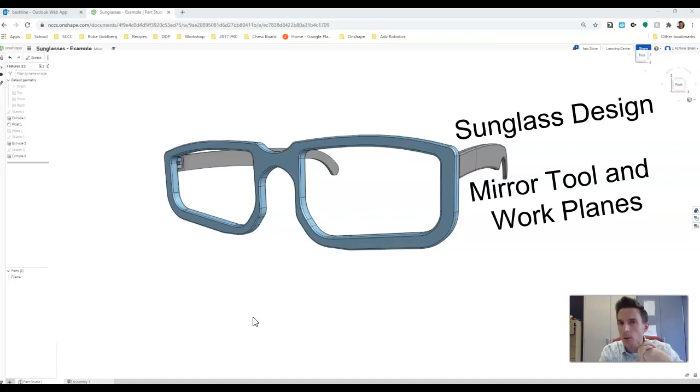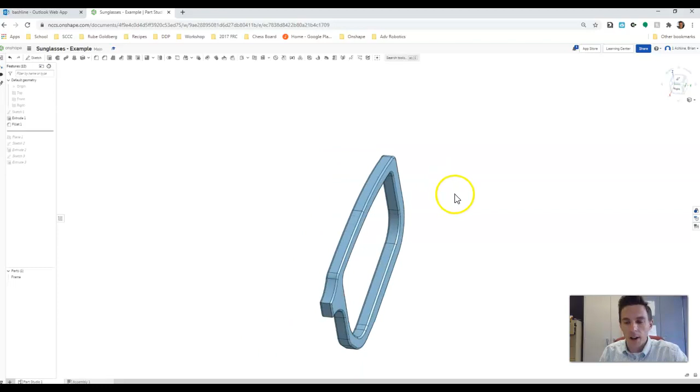So at this point I've drawn half of my frame. I've also drawn the hinge that's going to go into my frame, but that's one of the main things I want to show you today. So we're going to erase that for the moment and start back where we don't have that. Now the issue with creating this hinge is the fact that I don't have a flat plane to start drawing this thing on. I really want to draw it from the top view down.

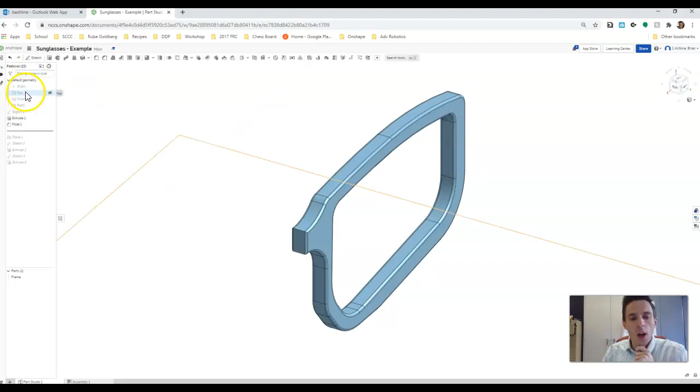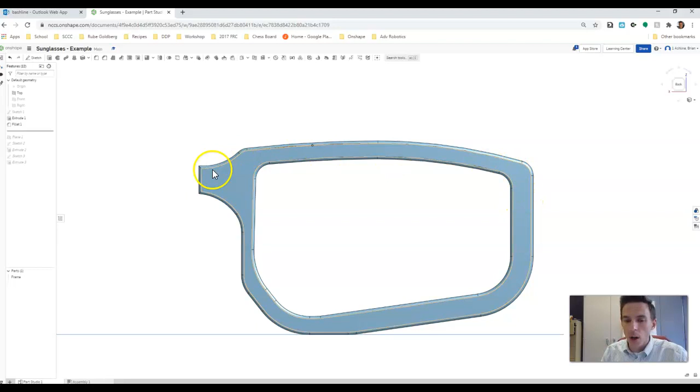Because of that, I really need to create a work plane, which we have talked about before, but I want to review it rapidly with you guys. I want to be drawing on my top plane, so I'm going to turn that top plane on, and you can see here's my top plane, but it's actually more towards the bottom of my object, or exactly at the bottom. I really want my plane to be at the top or the bottom of the hinge itself. In my case, I want it on the top. So we're going to select the plane tool, and select that top plane because that's what we're basing our planes off of.

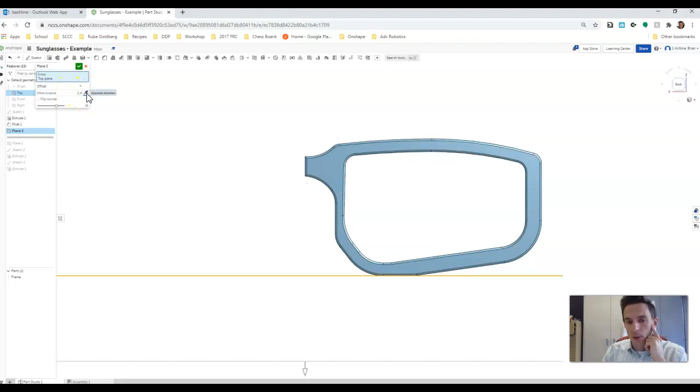When I look at this thing straight on from the front, or in my case the back, it doesn't really matter, I can define the height of this thing, or flip the direction of it, to whatever I want. Right now it's 1 inch. I want it to go higher, so maybe 1.25. Let's see what that looks like.

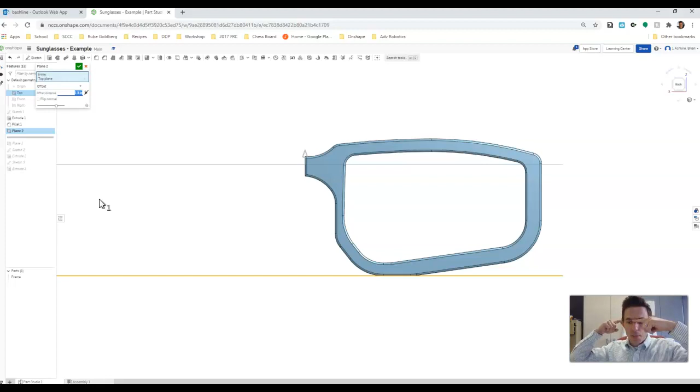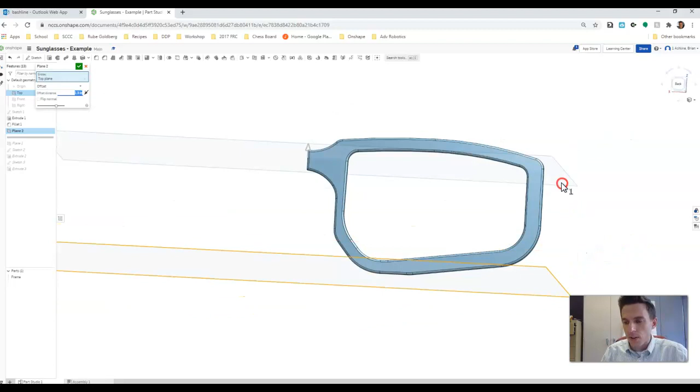That's pretty close, I actually probably want it a little higher than that personally, towards the top of my glasses. Remember, the bridge of your nose and the top of your ear - the top of the ear is kind of at your eyebrow area probably, so the hinge for your earpiece should be just a little bit above the top of the bridge of your nose. When I bring this thing in here, that looks pretty good to me, so I'm going to click the checkbox.

So now I have this new plane, it's called plane 2. I don't need my top view any longer. I can start to sketch on that plane, and I can start to draw that hinge.

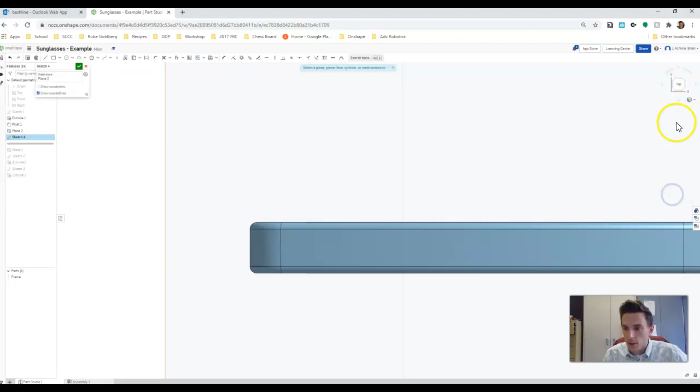Now another thing that will be really helpful for this, I think, is the section view. So underneath here we can go to section view - oh, did I cut the wrong section? Turn the section off. Oh, select the plane, sorry. So I need to select my plane, and then boom, I've basically cut away at the top half.

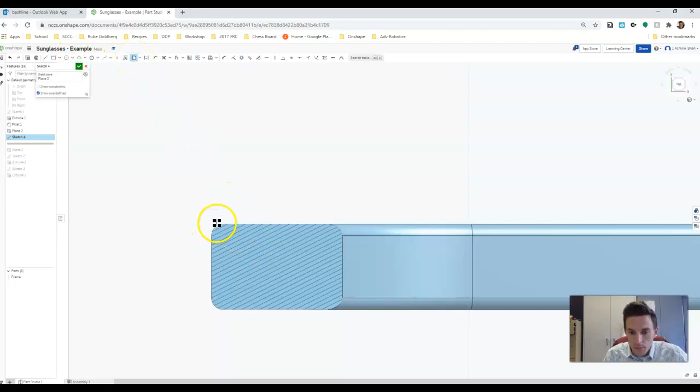Now it hasn't gone away, it's just not there right now. This gives me the opportunity to really start to add my pieces in. I'm just using that use tool that we've talked about before as something that I can grab from.

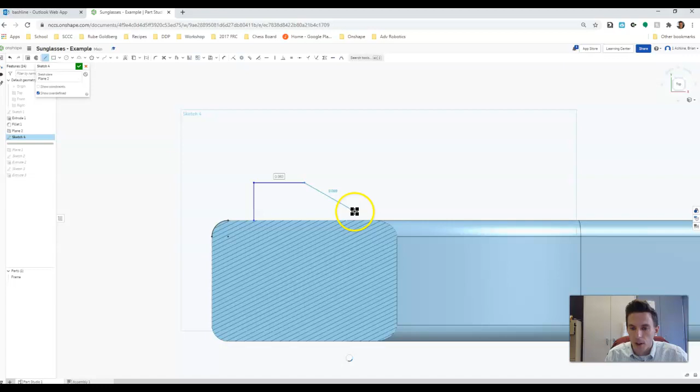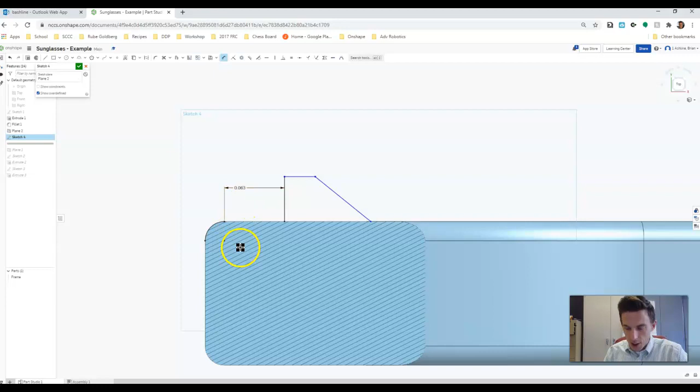I think for me, I really want the edge of my earpiece to be flush with the distance from the edge of the frame here. So I'm going to offset between the edge of my frame and here at a 1/16 of an inch, because I kind of want the earpiece to be a 1/16 of an inch wide. I want it to be flush with this edge here. So that will start there.

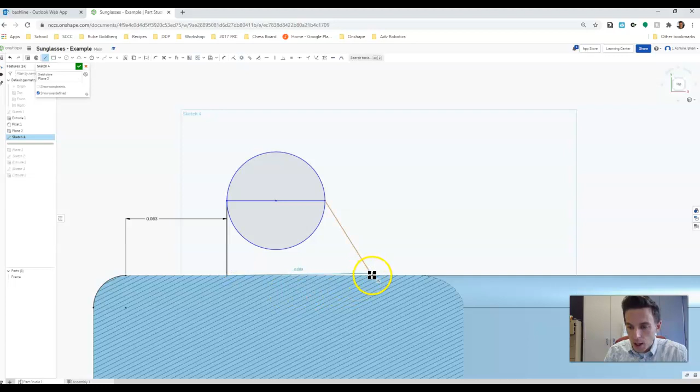And then again, your hinge is going to need to have some sort of a hole in it. Your hinge design and my hinge design do not have to be the same - as a matter of fact, I'd really prefer them not to be the same. But you're going to find a point where you can start to include these circles, because you need something that you can work with here. So I can trim that stuff away there.

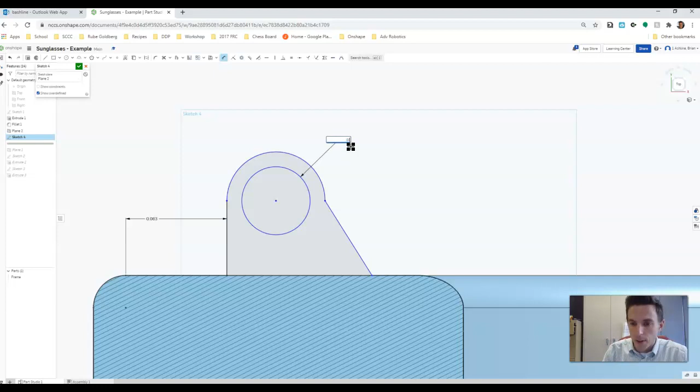I could even, if I wanted to, make that thing tangent. I'm not going to right now, but I can create something like this here. The inner hole is where your pin or screw goes into, and the outer hole is like the outside of the hinge itself.

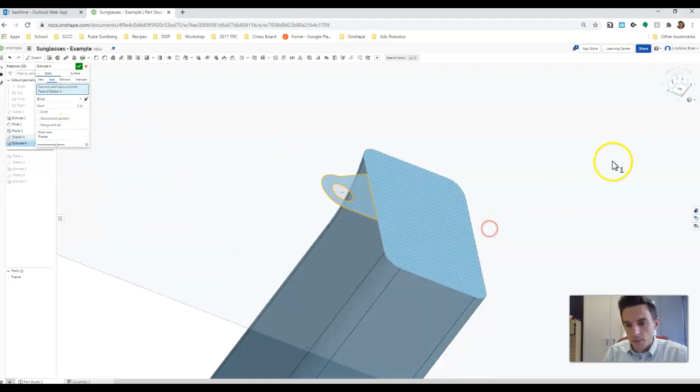I'm going to click the checkbox here, then Shift and E, and extrude that thing down. It's going the wrong way right now, which is why it's getting cut off, so I'll fix that. I should probably turn off my section view at this point to avoid confusion.

I want this thing to go down maybe 0.3 of an inch, maybe not even—that's pretty big. The scale of glasses is so small, like those hinges on glasses are so tiny.

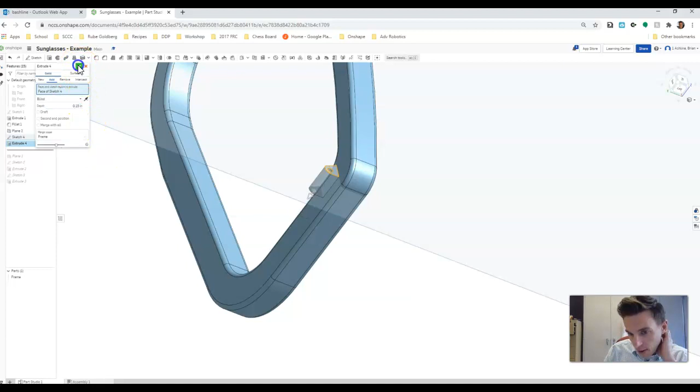So maybe 0.15, half of that. Yeah, that's pretty decent. Then I can turn off that plane, and I could sketch now on the side of this. With that sketch there, I can cut away for the centerpiece.

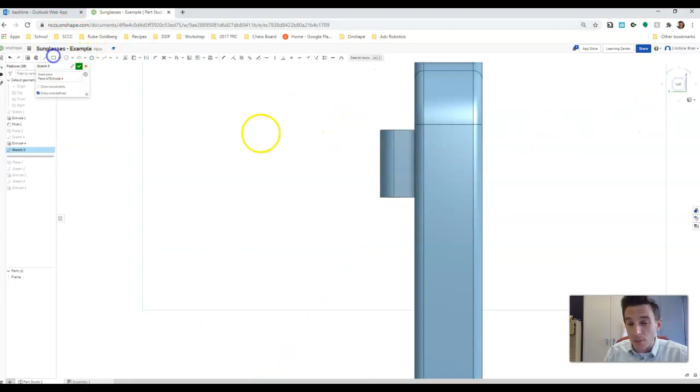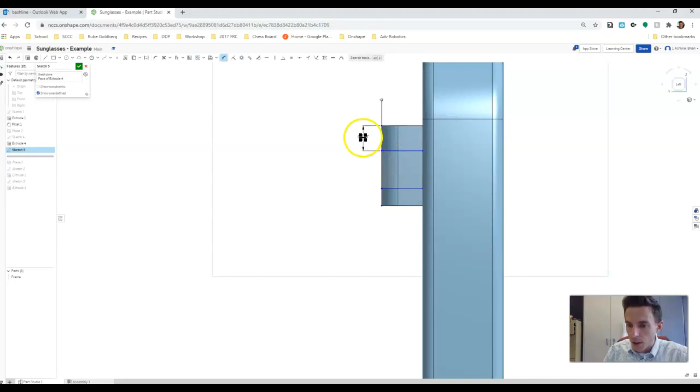Your frame is going to have a few different points, maybe just one—it's really up to you, but you need some parts that will interlock with one another. I think I made this 0.15 in total height, so because of that, I'm going to make this like 0.05.

This is going to be 0.05 as well—not 90 degrees, but 0.05. Then the bottom one could be 0.05 too, whatever is left there. What happened there? Apparently that didn't grab onto the right point here.

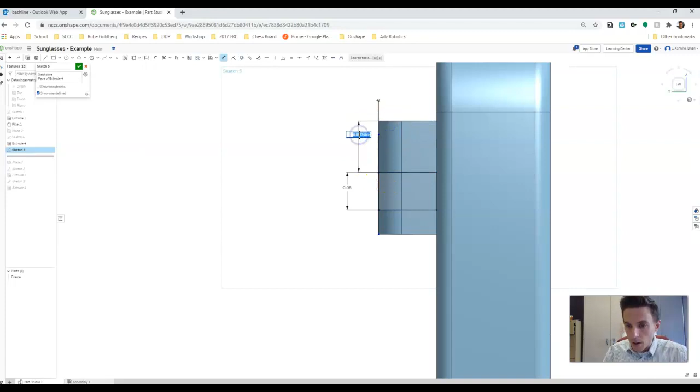Now I can go through, Shift and E, and remove this stuff. So there's something that would work perhaps as my hinge.

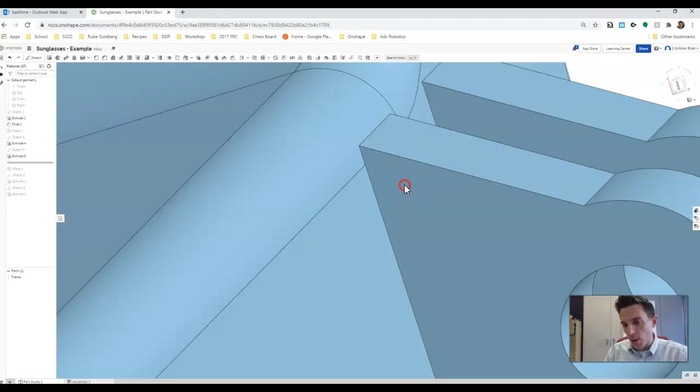Now, because I've already filleted this, I can see there's a bit of a gap there. So I'm going to go back to Sketch 4 real quick and make one fast adjustment so that it doesn't crash into that, something like that. Now I have a gap there, so that's good.

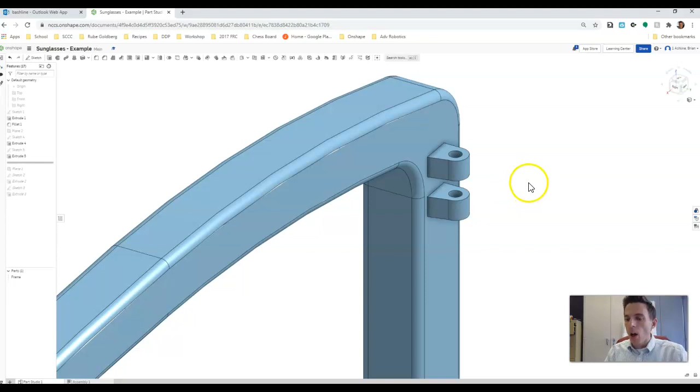Now that I have my hinge in place and my frame in place, it's really time to mirror this. When I created my fillet, I selected this edge here and here—I really shouldn't have, so let me unselect those edges.

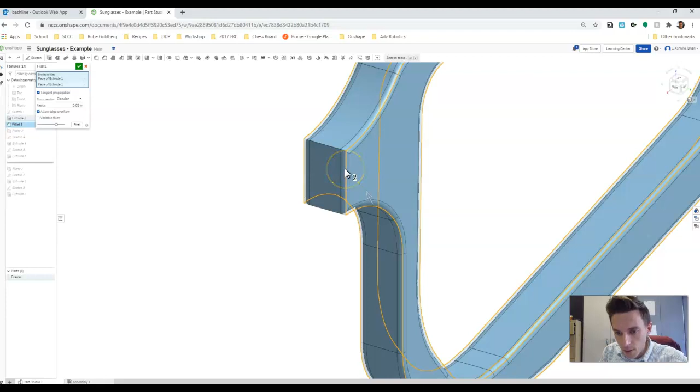I can at least... no. I might need to change my fillet to a different point. Yeah, probably. Alright, we'll come back to that.

Watch what's going to happen—I'm just going to delete that fillet, because it's going to screw everything up otherwise. So I have that fillet gone. I'll come back to that again.

We're going to move on now to the mirror command. The mirror tool is up here; we're going to select it. In this case we want to do a part mirror, since everything is the same part of your frame. We don't want to create a new thing—we're going to add to our frame.

We're just mirroring the second half of our frame; it's still the same part. Whereas with your left and right earpieces, you can mirror those too, but they're going to be separate parts, not one and the same. So you'd say new, create your left earpiece, then mirror that into your right earpiece, or vice versa.

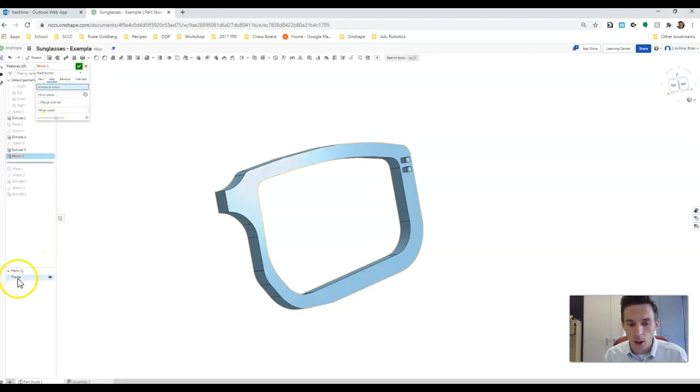But here, we're going to add, and it's going to be a part mirror. When I go to select my entities to mirror, I come down to my parts list and select the frame. Then it asks what my mirror plane is—it's going to be the center of the bridge, and that center line in your bridge should be going directly up and down, so it mirrors exactly.

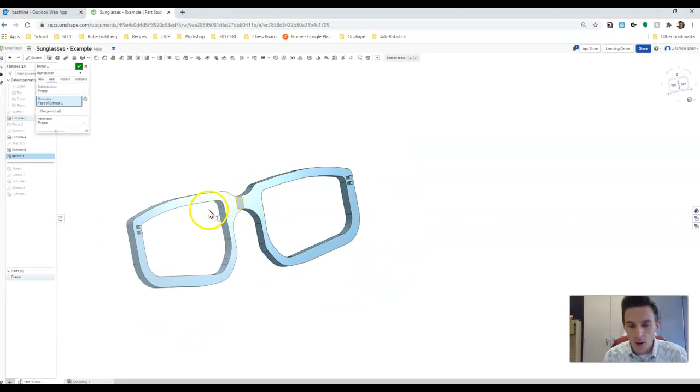Notice now that we've mirrored everything, including our hinge, because they were all in that same part. So we're going to click the checkbox, and now this thing is all the same part.

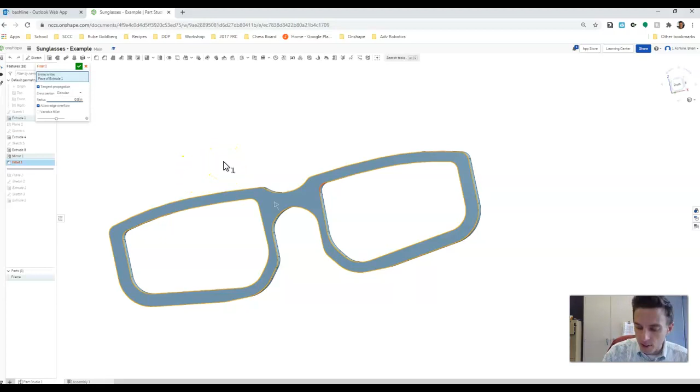So now I can come through and fillet. You're going to get errors in your fillets when they're too big. Like if I just click now, I can't do this fillet, because my fillet is like 0.2 inches, which is absolutely huge compared to the size of my frame. So maybe I could say 0.05 inches and give that a try. Even that I think is kind of too big for my personal preference, so maybe a 0.02 fillet, maybe a bit small.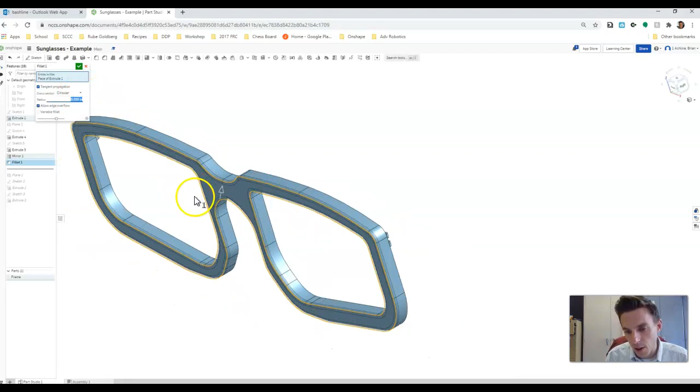Yeah, that's pretty good, I think. I can also fillet certain sections. Honestly, I don't want to fillet a lot of the back of this, but I definitely want to fillet around my earpiece. Oh, I guess it doesn't do the whole thing. That's okay too, alright, so I can leave it at that.

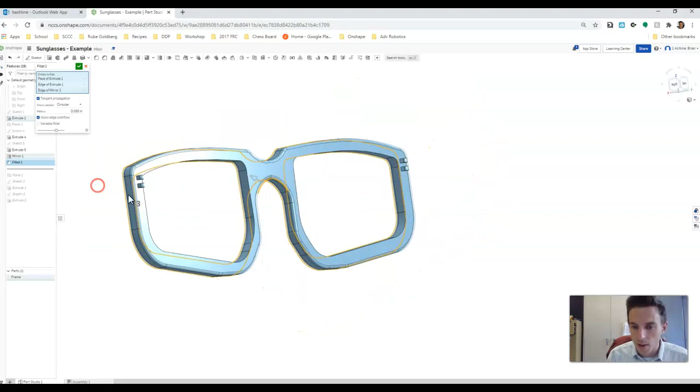The interior on the front I want to be filleted. You could fillet the interior on your back too if you want, it's totally up to you guys what you do there. But I'll select those as well. That goes all the way around, and then I can click the checkbox.

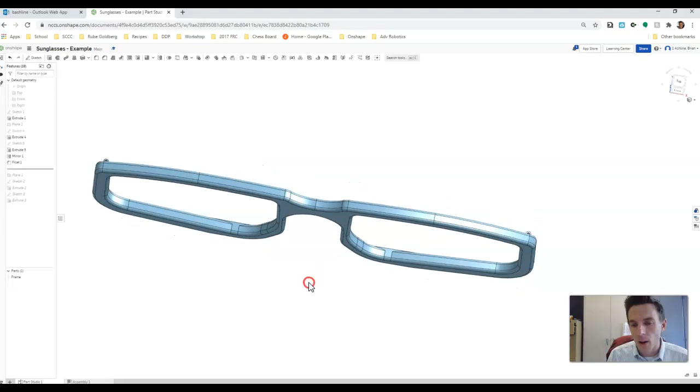What you really don't want to fillet is your hinges, okay? They're going to be left the way that they are. Alright, so I have my front frames done at this point.

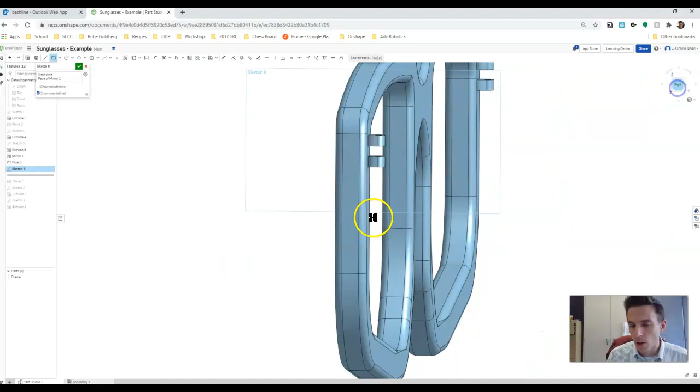Now it's time that I can start to draw my left and my right arms. When I do that, I would start sketching probably here. Again, you've got to base things off your own dimensions and your shape. But I can just show you, I would create an arm that came out at 5.5 inches, or whatever—again, it's totally up to you.

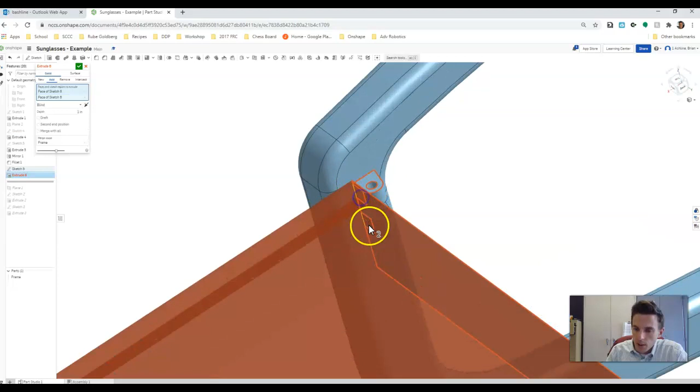So now I can take this and again grab this arm. You're going to need more going on with this, but I can grab this arm. In my case, I offset my frame hinge at like 0.0625, or 1/16 of an inch. So I can change that to be 1/16 of an inch, and don't add—in this case, create new.

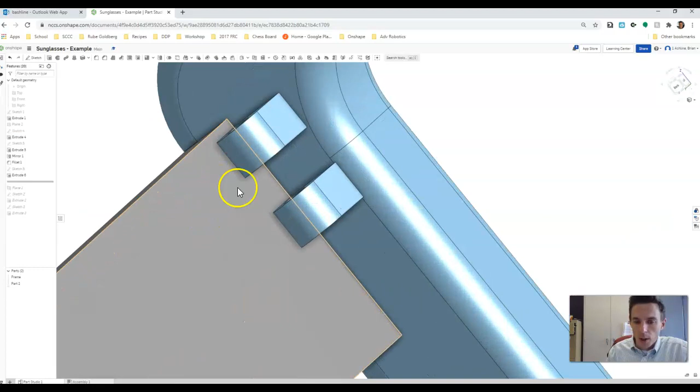Then we can start to design within here and start to make the other pin. Maybe you have 2 pins, maybe you have 1 pin. The other pin, or not the pin, but the socket that the pin will go into to create your hinge. And then you can start to shape this thing and create some different pieces.

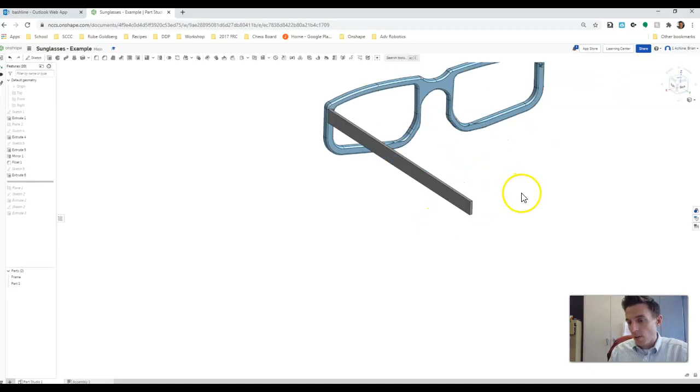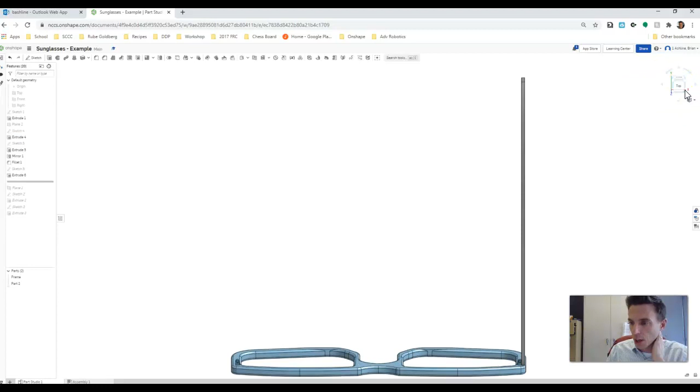Now some people may choose that they want to curve this in 2 directions. I'm going to create a new video on how to do that for you guys who are interested. But if you'd rather just leave it straight, you're welcome to do that as well—by straight, I mean straight from the top. There should definitely be some sort of shape going on in the side view, with some cutouts.

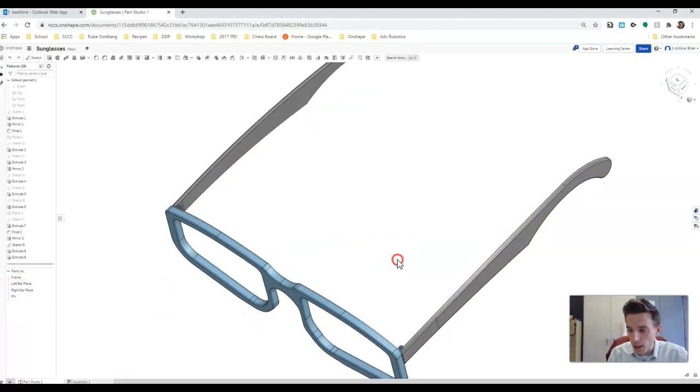So let me show you what I actually have for my finished product here. I haven't gone through and colored this or anything yet—these are still just my basic pieces. But notice I have my frame, I have my left earpiece, I have my right earpiece, and I also have the pin, or the screw, that's going to be going down in and holding my left and my right earpiece in place.

Okay, and you can see that the side of my earpiece has been designed. Again, the top of your ear—not like the top, but where the sunglass is going to sit on—and the top of your bridge are kind of aligned with one another. The bridge is a little bit lower than this, so you kind of want those 2 things to be vertically aligned.

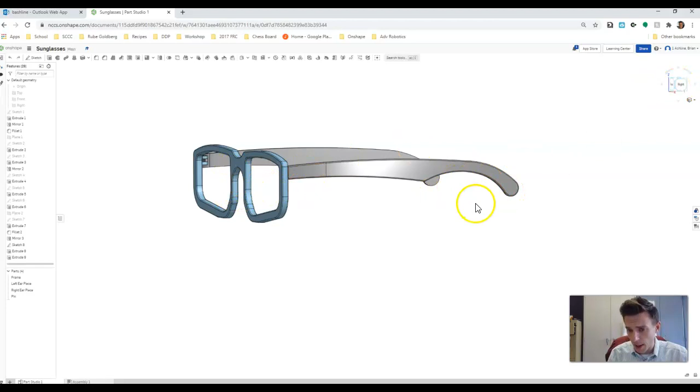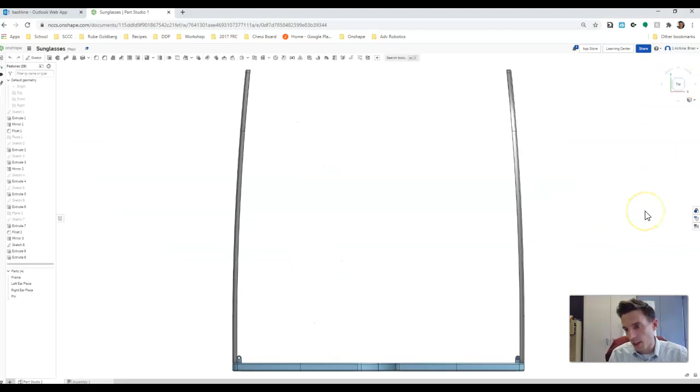I've also curved my arms in this direction as well. I've done what's called a compound curve, where I have a shape and a curve on the side, and a shape and a curve on the top. I'll show you guys how to do that in another video if you want.

But they could be straight back and forth with just some shape on the side there. Okay, if you have any questions, let me know.